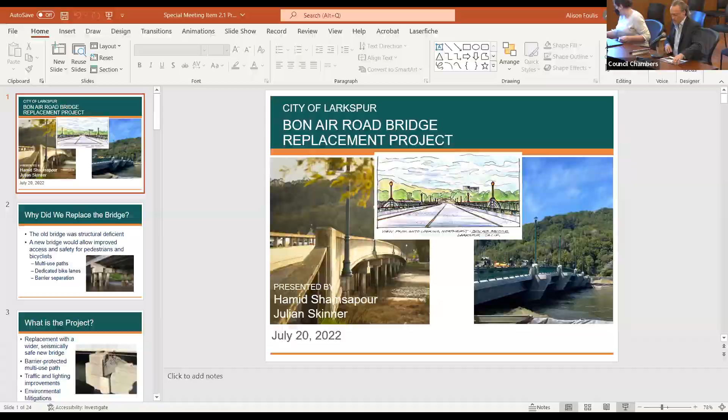Good evening, Mr. Mayor, members of council, members of the public. I'm Julian Skinner, Public Works Director for the City of Larkspur. Tonight we have a presentation for you to celebrate the completion of the Bon Air Bridge project.

As you know, we had a subdued ribbon cutting event on June 23rd out at the bridge. Due to the constraints of the bridge being open, we kept that a small event. So we said we'd come back to a council meeting and give folks who were unable to attend an opportunity to get another look at the whole project. Throughout the course of the construction, I've been before you every 6 months or so giving progress updates, so we thought it fit to come at the end and wrap everything up with one presentation.

This project well precedes my time at the City of Larkspur. In fact, it was designed and ready to go out to bid as I joined the city 6 years ago. To help cover the history, I have with us tonight Hamid Shamsapour, a former Public Works Director and city engineer here, who was instrumental in getting this project kicked off and securing the federal funding that led us to where we are today with a completed new bridge. I'll hand it over to Hamid to walk through the history, and then I'll come back to summarize the construction activities.

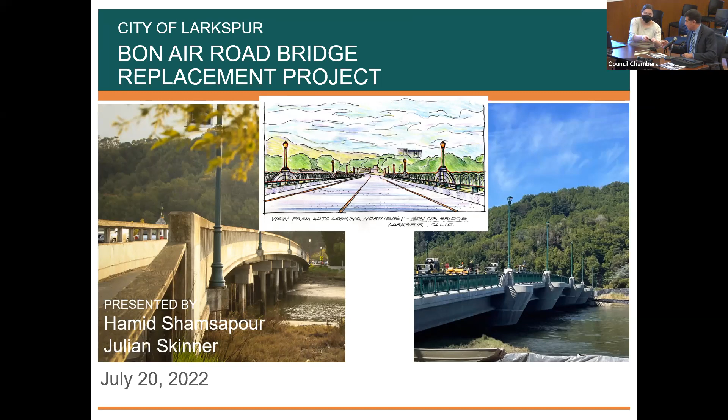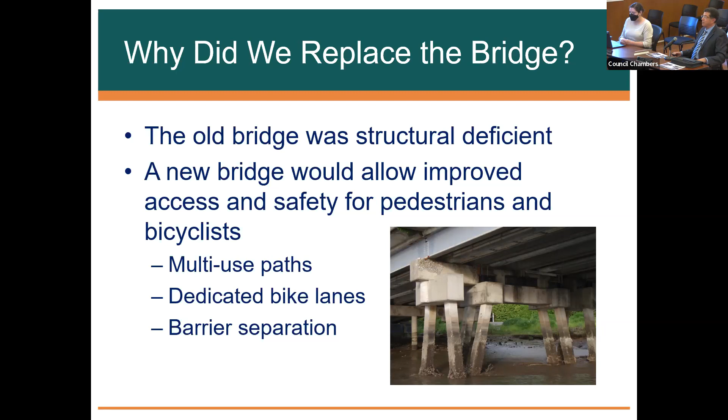But we need a multi-use pathway, and we need barriers for safety, and all those were considered in the design. What you see in the next picture is the concrete that was spalling from the structure because of the constraint of the old multi-use pathway, where the bridge couldn't move naturally, and that started the demise of the bridge significantly.

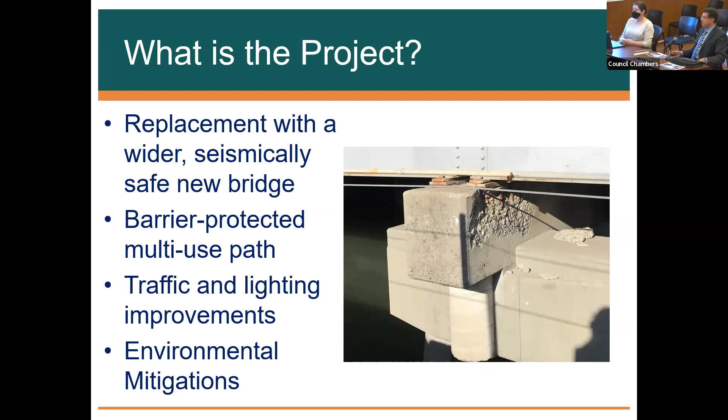So the design was to replace it with a wider, seismically safe bridge, protected barrier, traffic lighting, signal improvement, and environmental mitigations that were very significant. So in the next picture, you see the summary of the project history.

Original design 1958, major repairs in 1970. '94 is when I mentioned the seismic retrofit, along with that infamous class 1 multi-use pathway on one side of the bridge that led to the acceleration of the demise of the bridge and the eventual lawsuit.

Again, Caltrans inspected it, and it was determined that it's beyond its useful life and it's time for replacement. So that's when we started on getting the grants and design team and everything together.

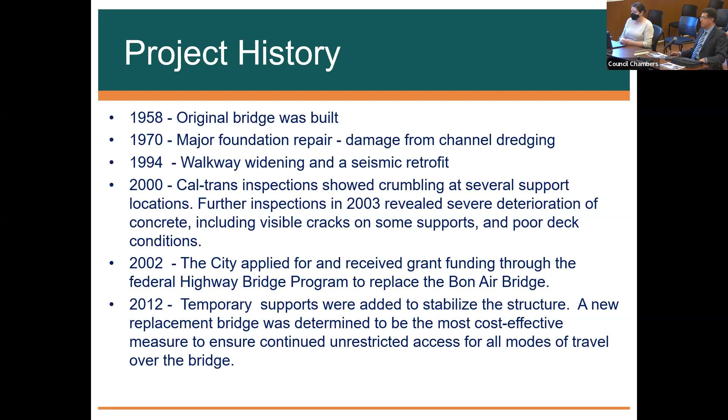And that's what we did in 2002. While we were waiting for the design, the condition of the bridge was so bad that we had to actually do some temporary stabilization of the structure, because we couldn't wait for the design and construction to start in the next few years—it was that unsafe. So we did some temporary repairs and stabilization to the bridge in 2012.

And here you see what I just explained a minute ago about the '94 widening, the seismic retrofit, and the additional class 1 pathway. You could see from these renderings the movement of the bridge that I mentioned with the expansion joints, and how its natural movement was changed because of that constraint.

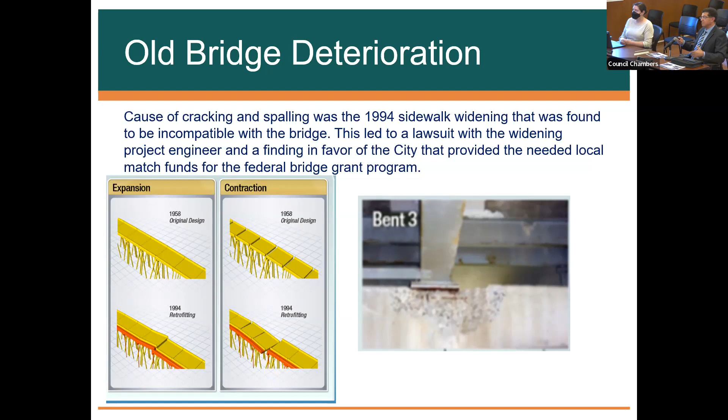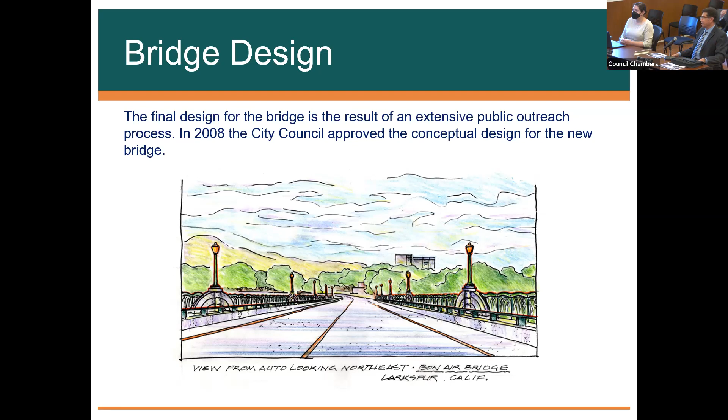So anyway, we went through all that process to find the right design, and this is what was rendered by our famous architect in 2008. We had about 12 different designs that we took to the community, and this is what was finally accepted—you could see it's very close to what's there today.

I don't have to tell you how beautiful it is, how safe it is, how user-friendly it is. For those who use the kayaks and boats that go under it, you saw the old columns, especially after the seismic retrofit, how many columns there were and how not very pretty it looked. Now look at it, very minimal columns and a lot of space for kayaks to go under, plus belvederes for people to stand and enjoy the beauty of the bridge and the surrounding area.

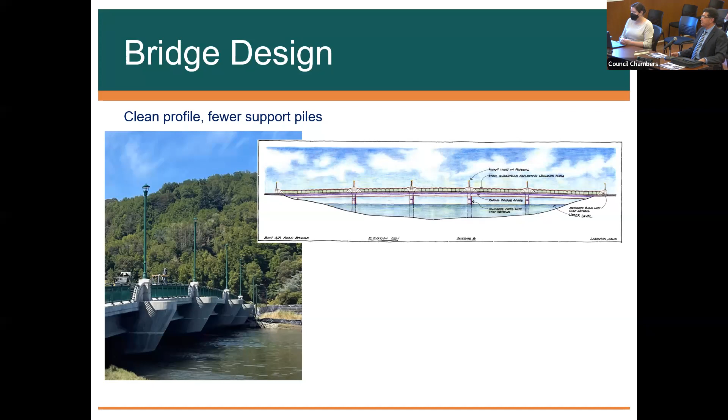I asked Julian to put this picture in just to show you and describe the detail. Would anybody here know why this railing looks the way it does? It was no accident, not just a design picked from a manual or cookbook. The vertical members are meant to match the grass vegetation in the area. If you look at it with that vision, you'll see it's supposed to mimic the surrounding nature and the grass on either side of the bridge.

The horizontal member is no accident either. That wave you see replicates the wave of the Corte Madera Creek, the water. So that's how detailed the design was, answering my good friend, the former council member, about some of the features of the bridge. There's a reason why things look like that - it was all by design, incorporating wonderful input from the community and the wonderful leadership of the council at that time. It was a win-win for everybody.

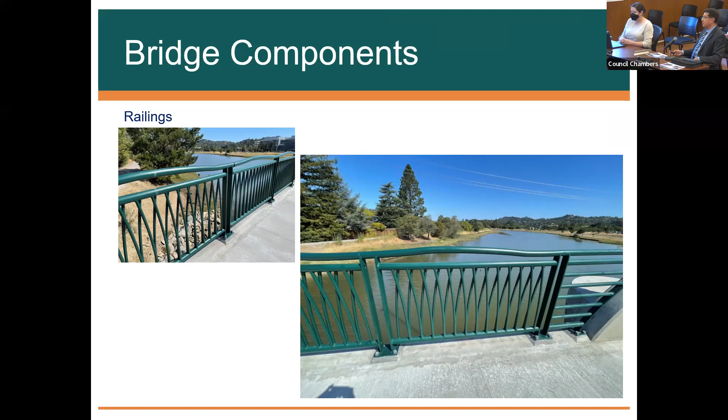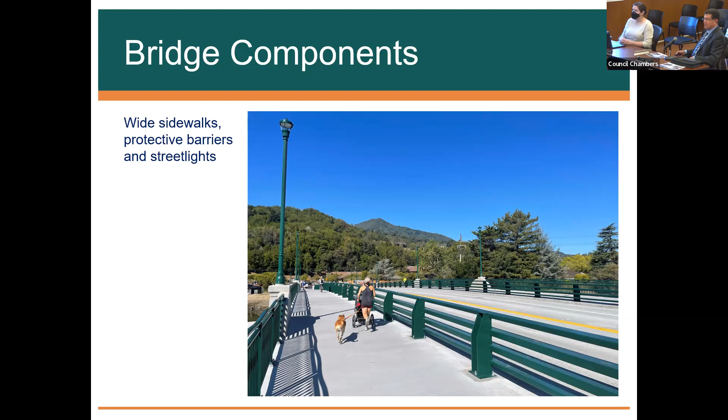So there you go. History was made, and I'm proud to have been part of it. Now I'm willing and happy to turn it over to my good friend, your current Director of Public Works, Julian, to tell you about what we went through for the construction. I'll be happy to answer any questions now or later.

Also the environmental side - I don't want to bore you with details, but the CEQA and NEPA I completed before I put it on the silver platter and left it before I left Larkspur, and left the construction. My good friend here finished the job, the permits, and coordination with utilities. These are all construction details we don't need to bore you with, but I gave you the highlights of the success - the design, the construction, and winning against the major force, the small city. From what I understand, the lawsuit we won is the first in the state of California for a small city going after a major corporation and getting that amount of award. That's what I've been told.

By the way, they appealed that decision. While they appealed, the money had to sit in escrow earning 10%. By the time the state Supreme Court decided again in our favor, the 8.3 had turned into 10 million. Just a little minor note.

Quick question - just out of curiosity, did you testify in that trial as an expert? Every day, every hour of the 5 weeks, I was there as the city engineer, director of public works, the face of the city, expert witness, and everything in between. I was involved from jury selection all the way to interviewing the jurors in the hallway after the verdict - exactly what was the turning point that made the decision go in our favor. So yes, 5 weeks. I had a great staff to take care of things while I was in court, but I stayed in touch with them during breaks and lunchtime, so I never left them alone.

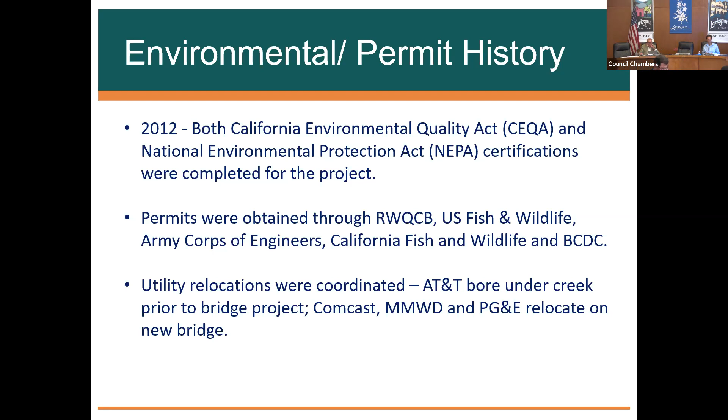Okay, so the truth is out there. So typically as an engineer, I always like to think of the work that I do as what they say about referees and umpires in sports: if you don't notice it, then they're doing a good job.

But this is a project that I don't mind celebrating and pointing to, and certainly will be at the top of my resume, even though I only came in for the closing parts of it, because there were so many people involved. I think it's really important to celebrate and recognize all of the past council members, past engineers, city engineers, staff, and consultants who worked on this project.

What you see over the last 5 years of construction is really just the tip, just the end. There's so much work behind the scenes that went into making this project what it became and got us to this point where we're able to cut a ribbon and open it up.

And for the most part, 99.9%, the project is finished. So you won't see me up here a whole lot talking about how great my projects are, but I'm happy to do it for this one because I don't really consider it my project. It's a huge team. Thank you, Hamid, for everything that you and your team did to get us here.

So just the last slide here, we heard a lot of questions about why a project takes so long, and there are a number of reasons. One is all of the species identified, or the primary species identified during the environmental reviews. I've highlighted two here that really caused the construction windows to shrink: the Clapper rail, now known as the Ridgway rail, and the steelhead in the creek.

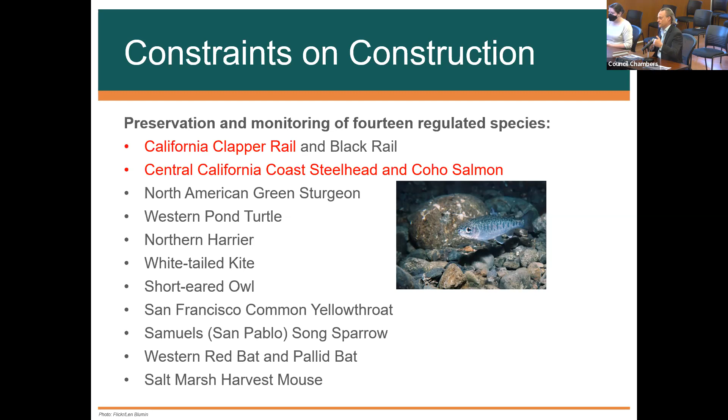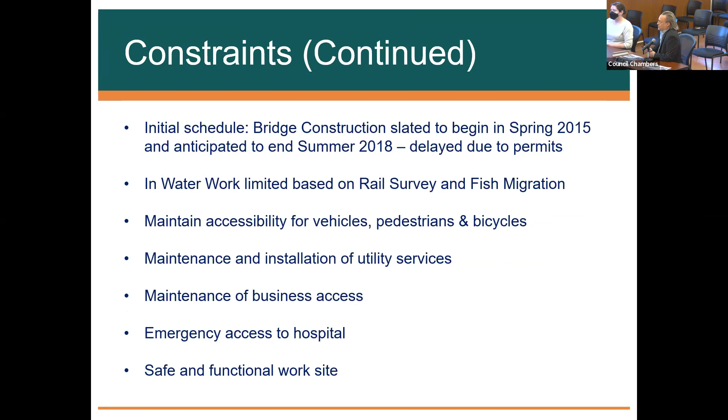So these were all constraints that got folded into the contract documents when it went out to bid. Other constraints, besides the environmental ones, included a decision to keep the bridge open during construction. So it was built in two halves, as you've seen through the construction updates we've given before, maintaining access to all the businesses around, including emergency access to the hospital.

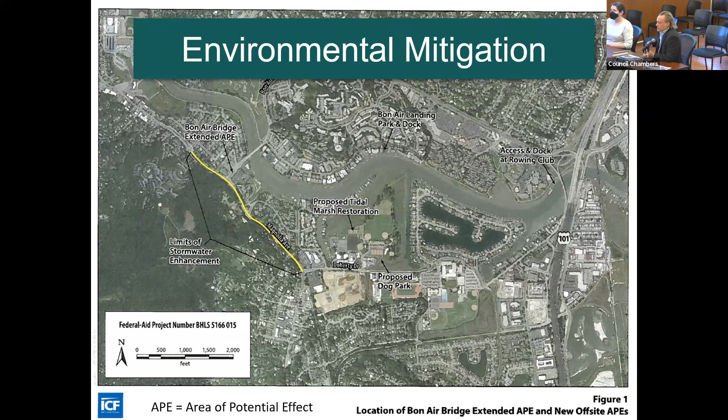We talked a little bit about environmental mitigation. There are some improvements we will be undertaking as part of this bridge project—we've talked about these before. Two of the city's public docks will be replaced as compensation for the bridge project, as well as some stormwater enhancement along Magnolia Avenue. And in replacing some tidal marsh area over at Piper Park, we get to build a new dog park, because the dog park now is what used to be tidal marsh.

So I'll jump ahead here and start talking about the construction. These are mainly slides you've seen in bits and pieces as I've come to you, but I think it's good to wrap it all into one so folks can see how this project came along.

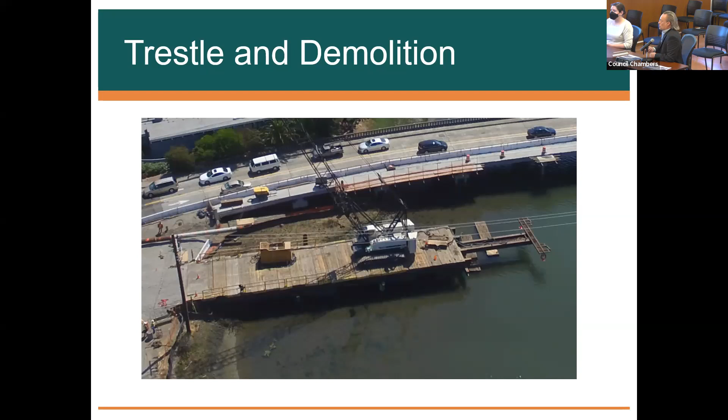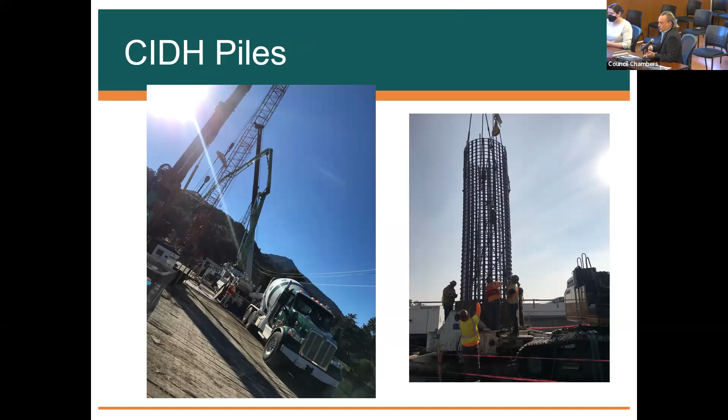Then the first real construction activity is the boring down into the creek bed, about 100 feet or so down to bedrock, for concrete piles or piers, 8 feet in diameter. You see them lowering the steel cage here into the deep holes, and then they would fill it with concrete, and that forms the foundation for the bridge.

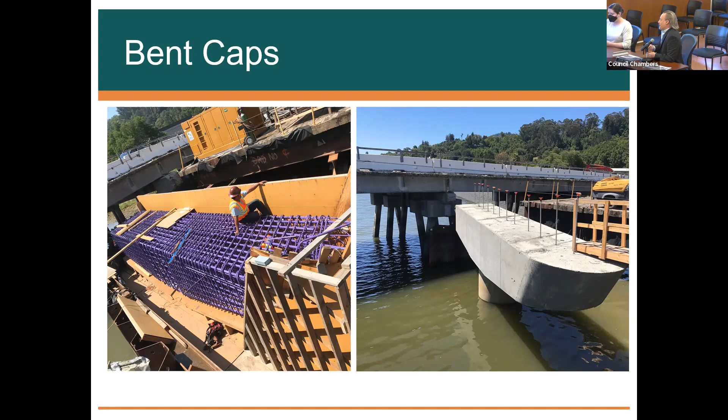And then they build these bent caps. The picture on the left shows all of the rebar that goes into these concrete elements before they fill it up with concrete. The picture on the right is the completed bent cap that sits on top of the pile going down into the creek. And then that bent cap is what the girders sit on.

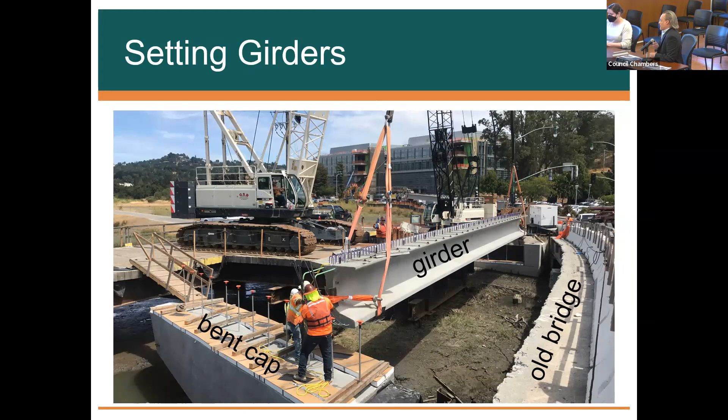So here is always a big day on a project: erecting the girders. Here's a photo of the first girder on the north side of the bridge. The two workers in the foreground are sitting on one of those bent caps and the girder is being lowered, sitting on 2 bent caps and spanning between them. You still see at this point, this is when we're building the northern half, so the old southern half is still in the picture. Once the girders are in, they start building the deck that everybody is driving on today.

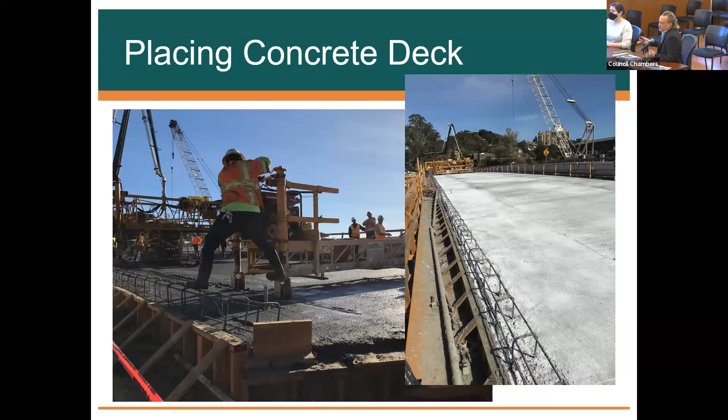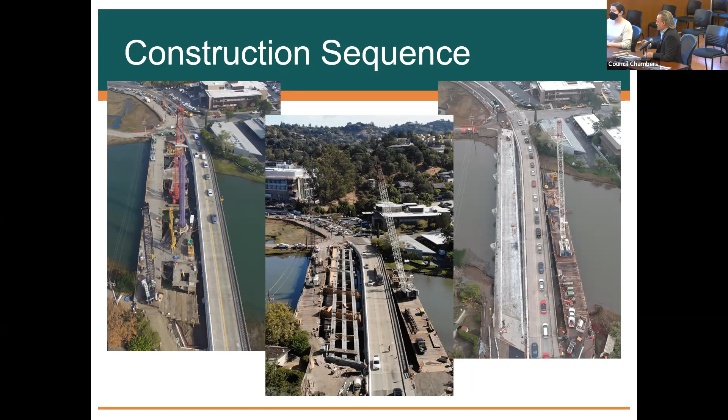Taking apart, going from left to right: the trestle is there, they've taken the bridge deck off. Here you see the new northern half of the bridge, and this is when they're just doing the demo. The next photo shows the old bridge is almost gone. And on the right, again, you see these little finger trestles coming out to use as a platform for drilling down into the creek bed.

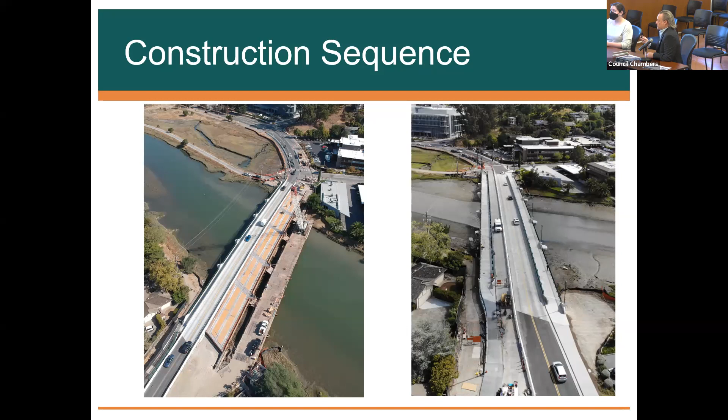For those of you that have driven through, you've noticed that the traffic signal at South Eliseo and Bon Air is still on red flash. That was the condition by choice during construction to manage traffic, and now that the project is completed, it's to be turned back into full operation. But that signal has some special signals built in strictly for bicycles, so it needs some software updates in the controller so those bicycle signals will work. We're working on updating the controller for that, and when that's complete, they will turn that signal on.

And then there's a pump station - some issues at the pump station. 2 of the 3 pumps are in. One of them is missing, needed to be repaired, and is scheduled to be installed. And then there's some check valves in the pump station that need to be swapped out too. So a few remaining things to be done.

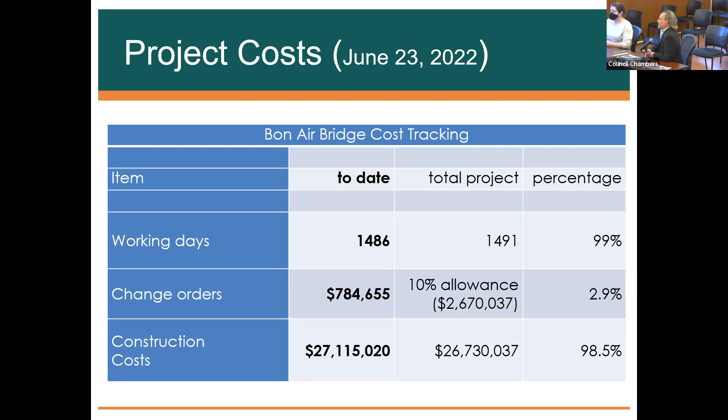As I mentioned, we did have an event out at the site on June 23rd. The sidewalks and traffic lanes are all open. That concludes everything I had to share, so I'm available for any questions.

Are there any questions? Go ahead, please, Kevin. Oh yeah, I'm sorry, I keep forgetting you're up there, Dan. You're staring down at us.

I just wanted to say again, thank you, Julian. Hamid put together the vision for this project and you made it happen. I watched it all because I live over in Greenbrae and I crossed that bridge during the construction phase almost every day with members of my family, and it was a wonder to behold. Watching from day to day the progress that was made, the care used by everyone on the construction team to make sure it was done safely, efficiently, and in a beautiful fashion. I want to thank you very much for that. I think everyone in this room and online would share those sentiments.